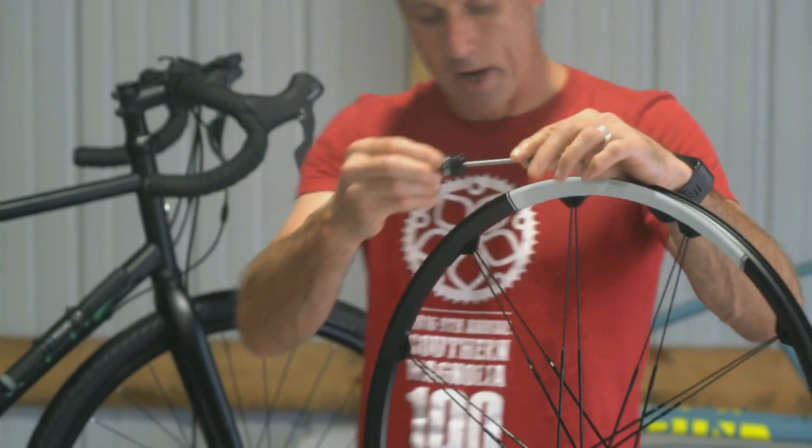So we're going to be mounting this rim up to a really cool bike. It's a four corners gravel bike, and it came with a quick release. So the person who owns this bike is not going to have to upgrade a fork or something just because he doesn't have a through axle. Quick release has been a standard for years, but you're starting to see fewer and fewer of that. Crank Brothers is nice to give you what you need for that.

They also give you the end caps for a 15 millimeter front skewer, which is a pretty standard skewer, or I should really call that a through axle. On the rear, they give you the end caps for the 12 millimeter axle, and that is all included.

Sometimes when you get something like this, you're really excited to go ahead and get it mounted up and get it on your bike. And as you know, most people are probably going tubeless. So if you didn't happen to have spare valve stems laying around, Crank Brothers includes tubeless valve stems. So as soon as you got this rim out of the box, if you had a set of tires, you can get this thing mounted up and be rolling.

And you notice I didn't say set of tires and sealant. It's always a good idea to use some sealant, but one of the advantages of Crank Brothers rims is that there's no spoke holes, so there's also no rim tape needed, and you can put a set of tires on here and blow them up with air and they will hold air. I've done that myself several times. I personally add a little bit of sealant just in case you puncture a tire or something. But if you really did want to run this rim without sealant, you could do it. I'll go into that more detail later.

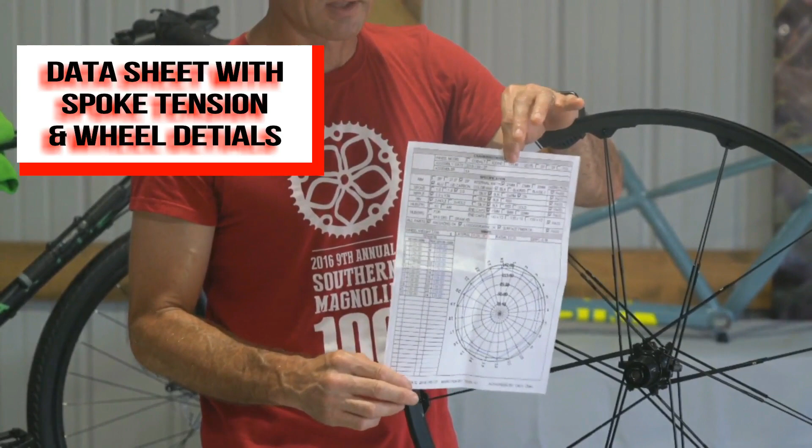This is really about unboxing, and one of the things that you do get on a set of Crank Brothers wheels that you don't get with a lot of other manufacturers is a data sheet. And this is important because this data sheet is really the lifeblood of this rim. It also tells you who built this rim, who inspected this rim, like a manager inspected it after someone built it. It really gives you a lot of detailed information on the tension of the spokes, and that is nice.

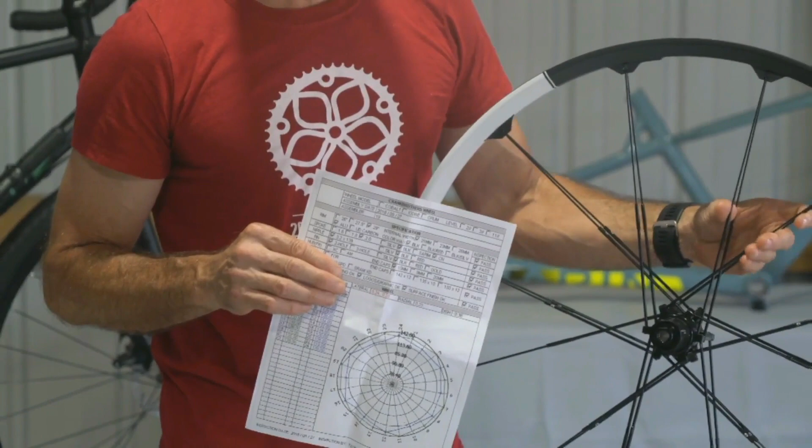Because these rims are built to such high quality or high tolerances that they have a specific tension in mind to keep this rim alive for years to come and perform the way it was intended to perform. And if you don't have this data sheet, you could just be guessing the spoke tension that you want to apply to this rim. I would say that the manufacturer has really done a good job of testing and R&D, and with the data sheet you can put this rim right back to original specs.

A data sheet's important, one, because it lets you know it's a hand-built quality rim, and that's what you're getting when you buy a set of these Crank Brothers Zinc 700C wheels. So the data sheet comes with it. It's not one data sheet for both rims, but you get a data sheet for each rim. So each rim has its own lifeblood into that data sheet.

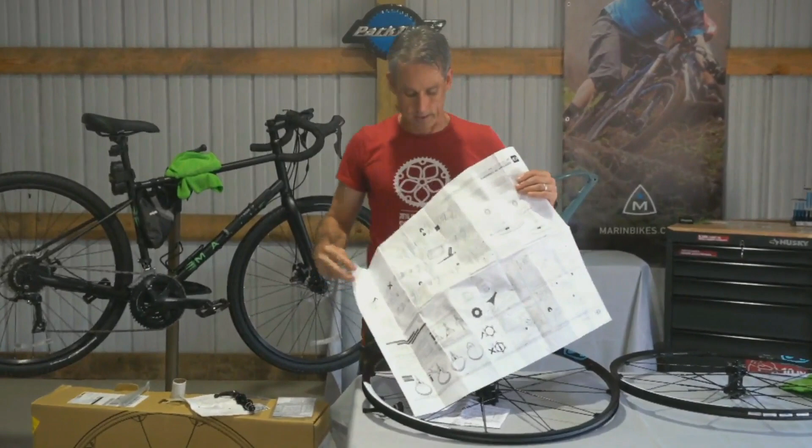Another thing that happens, a lot of us don't read instructions, and by the time we do pick up instructions, it's probably because we're frustrated we can't figure something out. Well, a lot of instructions that you get are so hard to read that it just frustrates you more. Crank Brothers has really done an excellent job of putting together instructions that even I don't mind reading, and a lot of times I wouldn't even have to read the words because the illustrations are so good on these instructions that it's easy to follow.

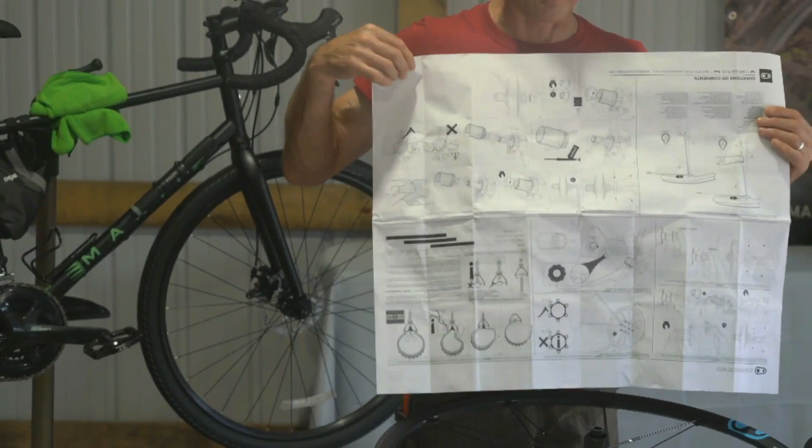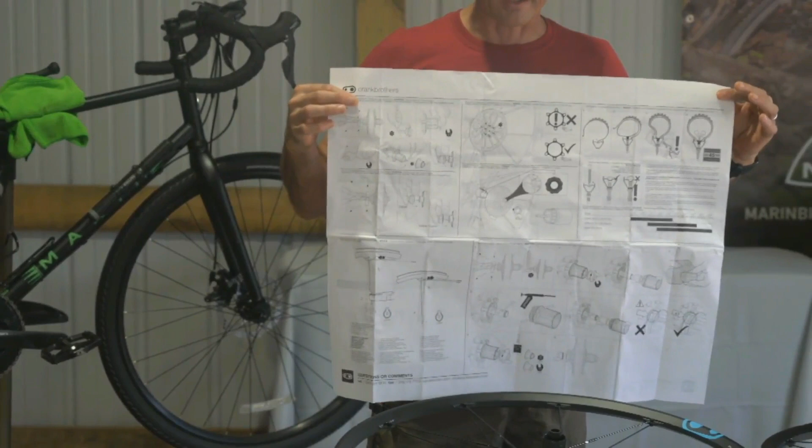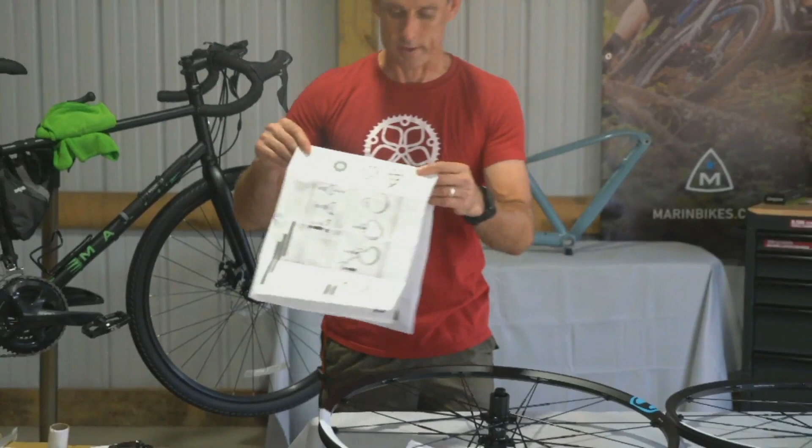I mean, right here I can see if you wanted to change to an XD driver, this is very capable of that change. So you could run Shimano cassettes, SRAM cassettes, and XD drivers. This is really a great, hats off to Crank Brothers for an instruction set that is so easy to read. And if you did go into opening this up already out of frustration, I think you'd be pretty confident that after seeing this you can get things together. It even tells you what size wrenches to use, and it's very easy to read.

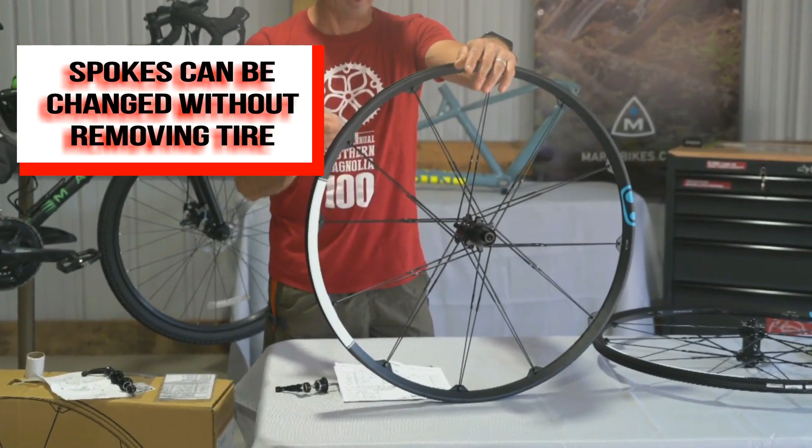One big advantage of Crank Brothers wheels is this proprietary spoke system that they use, and it's a unique spoke to the Crank Brothers wheels that is easily changed if you had a problem without having to dismount the tire. It's all external, so that is a big advantage. If you end up having to break a spoke or something, you have the same spoke for each side of the wheel. You don't have different lengths for the drive side and different lengths for the non-drive side. It's one size fits all.

So if you had to put something in your camelback or your emergency bag, it's one spoke. It's a twin pair spoke, and it's externally changed. It's a stout spoke. I've never had a problem with Crank Brothers spokes. I have practiced changing them, but I've never actually had to do it on a trail. But if I did have to, I'm pretty confident it'd take me about 10 minutes and I wouldn't have to unseat my tire. I'm going to go into more advantages of the twin pair spoke, and it's very interesting.

But on this video, it's basically just telling you what comes in this box and how the box comes packaged. So I'm going to cut this video short for now, because now you know what comes in the box, the condition that you should receive these rims in, and some of the accessories that are in this package that Crank Brothers has provided, that you don't get with a lot of other manufacturers.